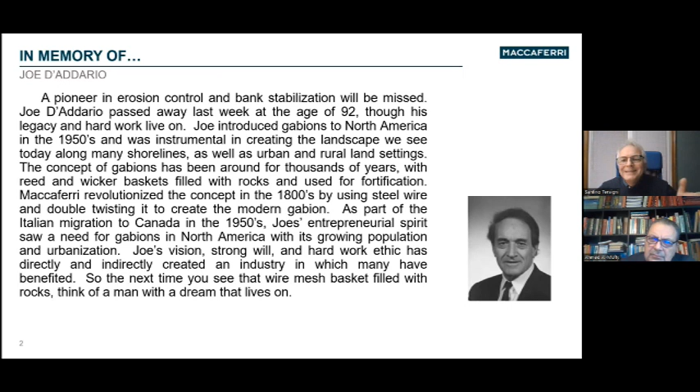And fortuitously, or not fortuitously, back in the 1950s, there was something called Hurricane Hazel. It was a huge hurricane that took place in Toronto. Major devastation, major problems, hence the reason why a lot of these conservation authorities developed here in the 1950s. Well, the wonderful part is gabions were used in Europe for a lot of transportation works within the watercourses. So Joe D'Addario had the perfect idea: why not use these gabions for watercourses? And that's why you see a lot of old watercourses used in conjunction with gabions, for bank stabilization along the banks.

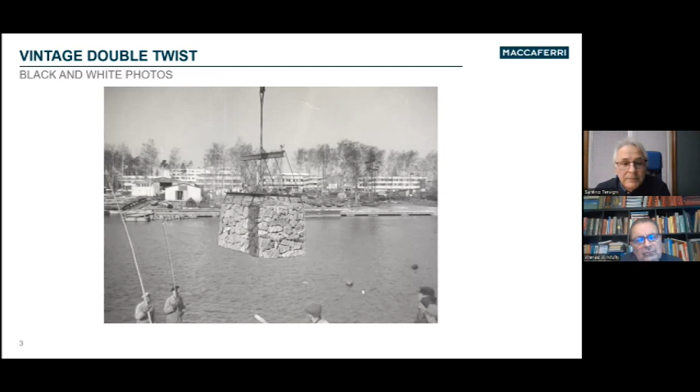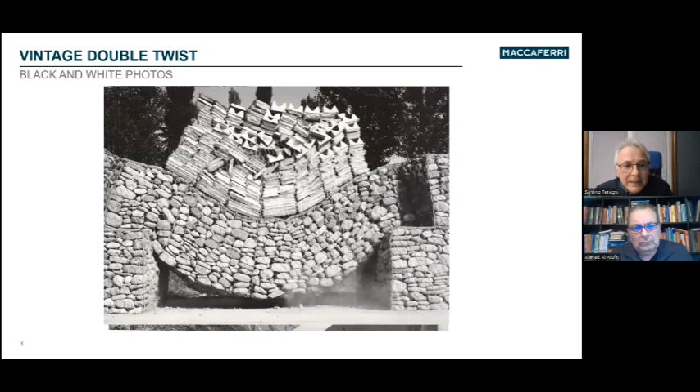So when you start looking at them, you start seeing gabions used all over the world. As I mentioned before, we started back in the 1800s when the Maccaferris first got their patent, but they've been used extensively. The gabions themselves are used in many configurations. They're wire mesh, and the wire mesh is used for anything from the gabions to rockfall mitigation. Testing's been done on the gabions to make sure that they're properly manufactured. They're used for erosion control in something called gabion mats or Reno mattresses. Again, back in the early days, they were cylindrical in shape.

Do you know the time these photos were taken? Well, that looks like a big steam shovel. I wouldn't be surprised if these photos were taken back in the 1940s or 1950s. Do you know when gabion walls were first used? Well, I'll get a bit back into the history, but Maccaferri introduced the gabions back in the 1890s. The gabions have a much older history, and I'll get into that in a minute. We're talking about 130 years for Maccaferri. Yeah, over 100, that's correct, over 140 years.

And actually, gabion is used in different ways. Gabion in Italian is gabione, and in French is gabion, which actually means cage. A gabion is a cage, like a bird cage. Oh, I thought it's a person's name. No, actually, Maccaferri is the person's name. The Maccaferris were blacksmiths. Macca means to beat, and ferri is iron. So you have Maccaferri, which means blacksmith. That is how the name Maccaferri came about.

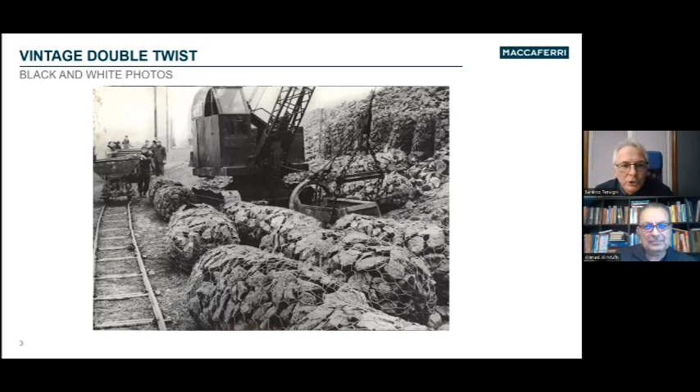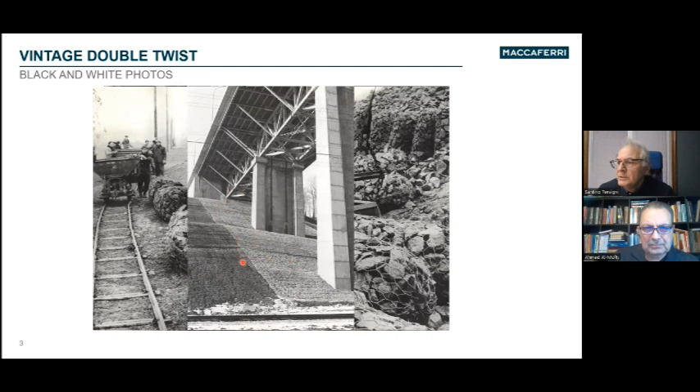But now you see these cylindrical gabions, and the same thing, they were used for erosion control. Rocks filled with baskets, or baskets filled with rocks, and they're used for shoreline protection. These same gabion mats are also used for erosion control underneath bridges and structures. So again, it's diversified in terms of what you can actually do with these gabion structures.

And yes, they've been used for a very long time internationally. But the main thing is, you asked about the history. What's interesting is the gabions actually started back in the Egyptian times. The Egyptians used to get reed baskets. So the reed baskets were filled up with rocks, and they were used along the Nile River to stop erosion along the Nile. And the same concept of baskets filled with rocks was also used during medieval times for

fortification. So there was a battle, there was some kind of a disturbance. They would get, again, wicker baskets, fill them up with rock. Once you have this, you can actually fortify your castle. And during war times, and Maccaferri was around during the World Wars, both the first and second, the same thing would happen with more or less fortified bunkers. They were used for fortification, the gabions themselves. Again, you're filling these things up with rocks. You're creating mass is what you're creating with these things.

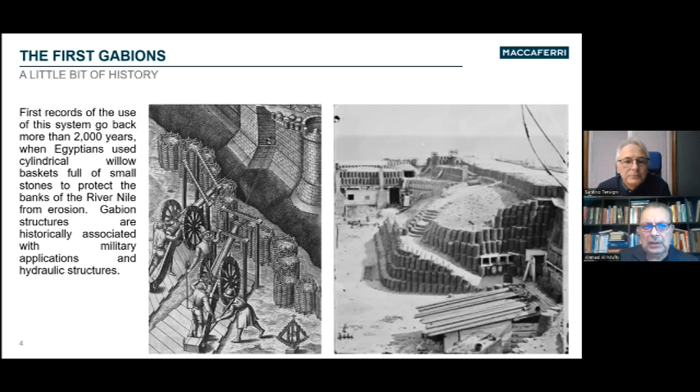Yeah. So where did the Maccaferris come in? We talked about reed baskets. We talked about wicker baskets. What the Maccaferris did, they modernized it. They introduced steel. They introduced the weaving system. So they had a small problem along the Reno River in Bologna, Italy. The same problem that happens nowadays, you have erosion along the shoreline. The Maccaferri solution: the same thing the Egyptians did, take these wire mesh baskets, pile them up along the riverbank, and let's see what happens.

Yeah. These ones which are already 100 years, are you talking also about steel meshes? Yes, it's steel mesh. There's approximately a 30% depreciation in the mesh. Obviously, you're talking about a structure that has gone through many floods and many disturbances, but the essence of the wall and the essence of this erosion control measure is still in place. Okay. Yeah, which is quite impressive.

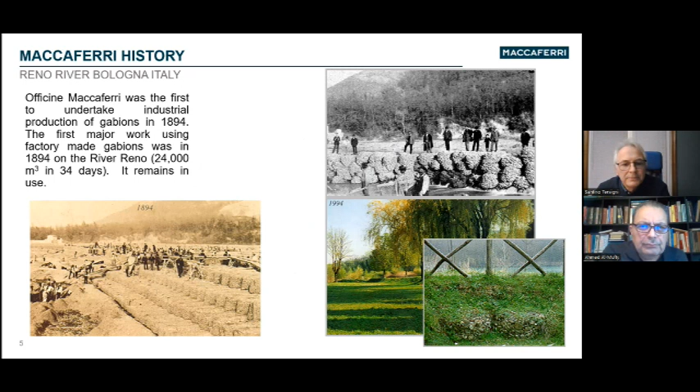Now, Maccaferri, from its humble beginnings in Bologna, Italy, is now an international company. We're all over the world, anywhere from Australia all the way to South America, into Russia, and right across North America. So it's an international company. What does it mean for everybody? It means there's a level of standardization. As you know now, globally, everything's our backyard. We can be in North America designing things in Australia, or in South America designing things in Russia. Anything is possible. That's globalization. Exactly. So that's where people can take advantage of this globalization by using this type of practice.

So Maccaferri has diversified quite a bit. Again, from this basic gabion concept, we've gone into rockfall mitigation. We go into dewatering, environmental. We get into other types of geosynthetics. We get into erosion control systems. So the company itself, because of the gabions and the demand by outside consultants and by our clients, has actually expanded in a lot of ways.

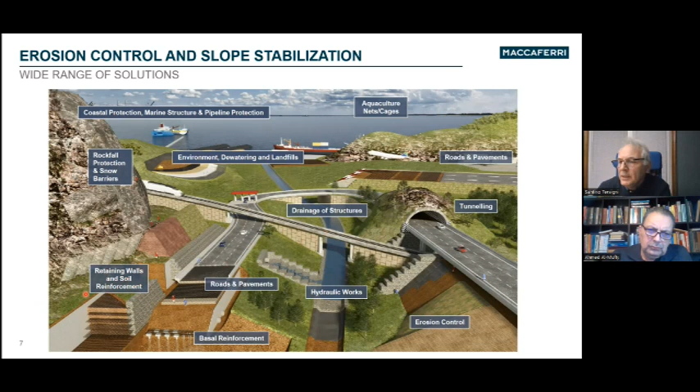We also get into ground stabilization, ground reinforcement, erosion control measures, erosion blankets. There's a lot that's done. Soil nailing, soil anchoring. Again, the company itself is diversified. The main crux today, though, we're going to concentrate on gabions. So the main area we're going to be dealing with is retaining walls, and in particular, gabion retaining walls. I wanted you to tell me, why should I go to gabion walls?

It's a 130-year-old technology, and it's been... Yeah, why should we choose Gabion walls? The biggest advantage to the Gabion walls, Ahmed, is its simplicity. They're a basic gravity wall or semi-gravity wall. So we can say, for example, I will save a lot of time for the project. There's a time aspect, but there's also a security aspect.

The best part about Gabion walls, let's say versus a concrete wall, we don't need a foundation. Gabions can more or less be placed on grade. Slightly buried, but we don't need a foundation for a Gabion. So they're excellent in North America where we have freeze thaw. Yeah. They're great in places where we have tectonic processes, where there's, let's say, a lot of earthquakes.

The beauty of the Gabions, and I'll show you in a bit, everything is connected together. They're also more flexible than a concrete wall. Exactly. And that's the benefit of the Gabions. You see them used in Europe almost exclusively in the mountainside for that flexibility. Everything is clipped and laced together to create these monolithic structures rather than blocks being placed together. That's where these benefits come in.

I use the Gardiner Expressway every day, and I see Gabion walls on my way. Are they yours? Possibly. If they were done a while back, they are. But no, it's like maybe recently, maybe 1 or 2 years, and they're still working nearby.

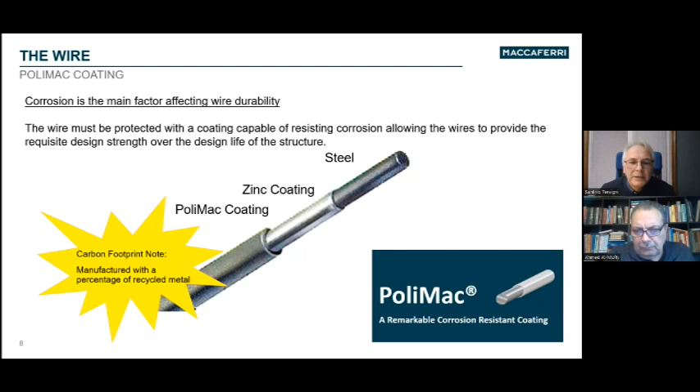The PoliMac coating, and that's the benefit of the PoliMac coating. We're finding out that sometimes the old steel is not the best steel. Sometimes the new steel has to be vamped up a bit, and that's where the PoliMac comes in. With this new coating, we're able to get better abrasion resistance.

What is abrasion resistance? If you think of it in watercourse applications, as much as the water seems clear, for streams, creeks, rivers, there's always particles within the water. And these particles have a sandblasting, abrasion effect. And that's where the PoliMac comes into play. It's 10 times greater than regular galvanization and regular PVC coating. Much better.

Low temperature resistance, UV resistance. You find now that the UV obviously is much higher, and this is not only in Canada, this is also international, and that's where the PoliMac excels. As well as for us, low temperature is important for us.

Especially now, we're freezing all the time. Yeah. We're freezing all the time. Yeah, so it's one of the disadvantages of being in the Canadian, I wouldn't say the Canadian Arctic, but in the Canadian environment, we have these 4 seasons, and this cold winter season. Yeah, definitely, it's very cold.

So again, this also goes into resistance to installation damages and chemical resistance. So overall, we've done the testing with it, and PoliMac is the material of choice when it comes to areas where there's aggressive environments, and that's where we like to use it.

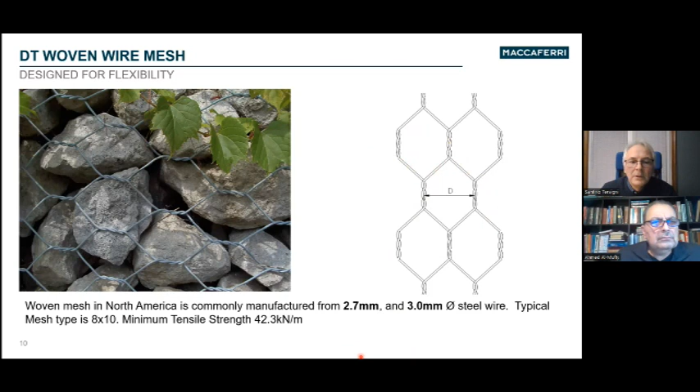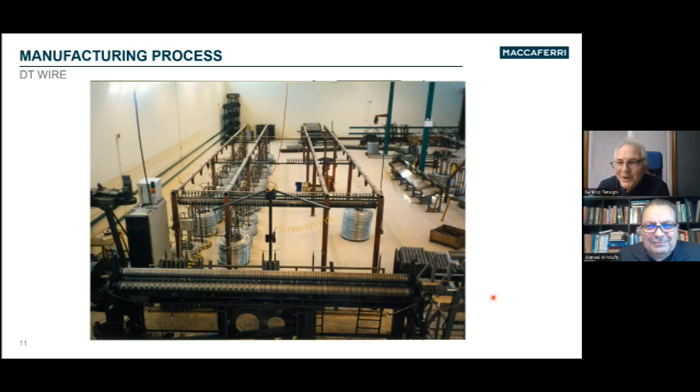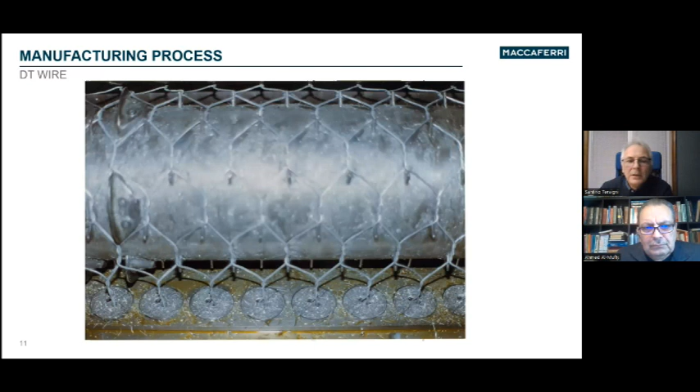Okay. So the process itself is straightforward. We have what's called weaving machines. The same way you weave clothes, you're actually weaving wire mesh. If your audience goes online, you can actually see the weaving process. It's actually kind of neat, a very interesting process. And it creates this mesh. Once it's done, this mesh is then made into baskets, into gabions, or it can be made into other products that Maccaferri manufactures.

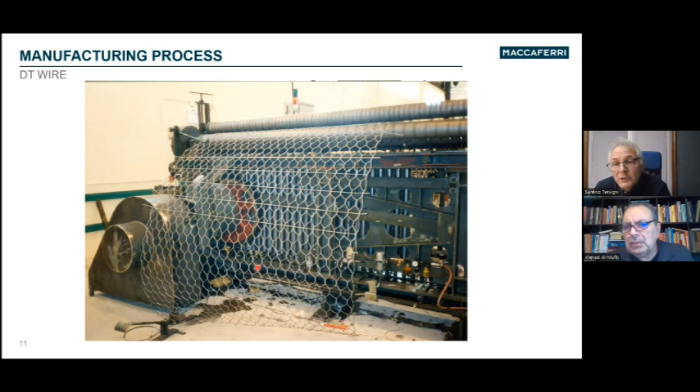Do you produce the baskets in the same factory, or do you take the wire mesh to another factory? It's all in one factory. The wire is given to us, and in certain places, we actually draw the wire ourselves. We also coat the wire with PoliMac in-house in our facilities. Once that's done, the mesh is drawn out either in 2-meter or 3-meter sheets. We can also go up to 4 meters, but 2 to 3 are the standard. These are not rolled in long rollers, but they also can be rolled if used for rockfall mitigation. We also sell rolls of mesh. Oh, so you can do either. That is correct, sheets or rolls.

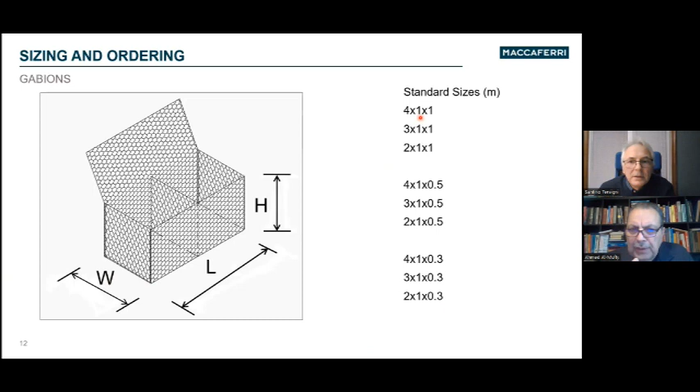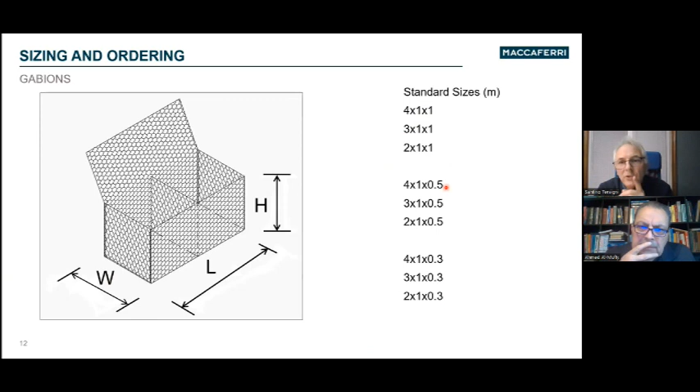Now, which one is the height? It's 4 meters. 1 meter is the depth. 4 meters is the length. 1 meter is the depth. The width. Is the depth, the width? You can say width, yes. And 1 meter is the height. Is the height. So the one changing is the height. So correct. You have 1 meter, 0.5 meter, and a very short one, 0.3. 0.3 meters, 1 foot. Yeah. Correct. Though I'll show you in a second, if you look at the baskets, they become flat.

So theoretically, you can get a basket, and during the assembly of it, you can shift it on its side, so it can still be 4 meters. Now it can be either 0.3 or 0.5 meters in width and 1 meter high, by how you actually lace the basket together. Okay. Right? So when they do come to the site... How do you fix these baskets? You do them at site, right? Correct. And that's the benefit to the system.

They come in bundles. Once they get to the site, think of it as a banker box you would get at one of these stores. The box, you fold it together. Once the box is folded, it's either clipped or laced together at the edges. And you create individual boxes. What do you use for the clipping? The clipping is something called a Spenax clip, and I'll show you that in a minute. Yes, please. These are hog rings. It's like a C, and the tool squeezes it to make a complete circle, to make a completed clip.

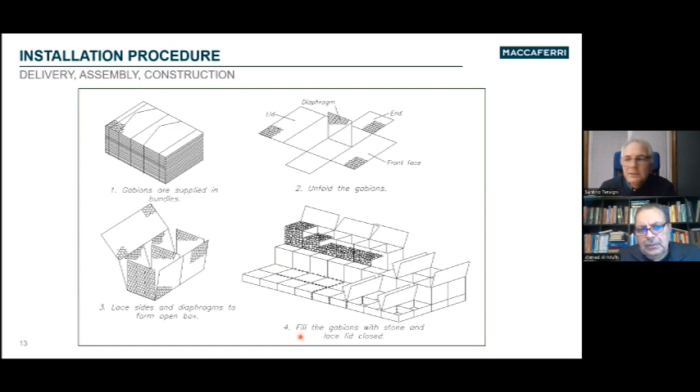So as we discussed before, because you created this monolithic structure, it's great in areas where there's differential settlement. It's great in areas where there's seismic activity. It will give you a lot of flexibility for the movement. That is correct. And that's the benefit to the system, is that flexibility. And you mentioned how they come to the site, and this is another benefit to this type of system. Because we can carry so many gabions to the site, there's a huge reduction. The only two materials you need are your gabion meshes and the rocks. Maybe a couple of boxes of clips and that tool you're talking about.

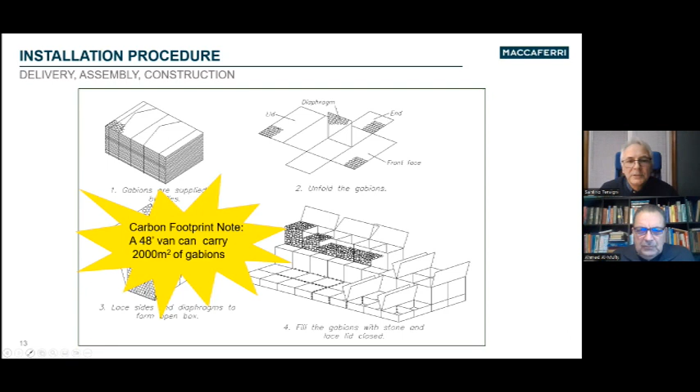That's it. So they can be shipped internationally. So when Mr. Joe D'Addario was here in Canada, he was shipping them, and you were getting lots of material in a container versus concrete blocks. Nowadays, these blocks are anywhere from a ton, 2 tons sometimes. So there's a lot of carbon wastage using a lot of these blocks. I understand the efficiency aspect of it, but again, this is something to consider during the process. Well, of course, it's considered these days. But I love it. That's why I love engineering, because you can always have very simple solutions for very big problems. Exactly.

So Ahmed, you mentioned the clip. There it is right there. It's something called a Spenax clip, and it uses something called hog rings. It's a pneumatic tool. You need a compressor to operate it. Once you push the trigger, it creates the clips. And typically this is what we use in North America. We also have wire, and this wire can be used to do it manually. So the manual system is just lacing it together. Same way you would lace your shoes, you would also lace these gabions together.

So do these have special tests? Correct. We've done testing on both the lacing as well as the Spenax clips, and it's comparable. Either system is acceptable. In Ontario, do you know what kind of tests you applied? Is it just a tension test, or what do you use usually? It all goes by ASTM A975, the ASTM standards. We will check that, no problem. Yeah, okay. But it's through ASTM when we do the testing of it.

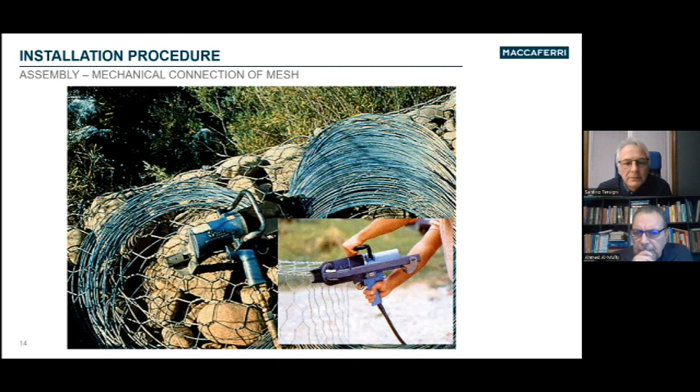So the next is the rock. We discussed the rock. The rock that's typically used right now, you're looking at a 100 to 200 millimeter stone is what you'd like to use. And it's a gradation of stone. Typically, it's a fractured stone that is used. River run stone is sometimes used. We don't recommend it because of the roundness, and sometimes it doesn't have that interlocking. We will lose the friction.

I don't agree with river stones. No, river. But they're done. Sometimes it's available, and if done properly, the walls could still be done. But again, you will have less stability for that. Yeah. I'm a fan of the angular rock, is what I am. Of course. And it's cheaper, I think. No? Which one is cheaper?

What's cheaper right now is usually what's closest to you. So if there's a quarry nearby, typically a quarried stone is the cheapest here in Ontario, where we are. And there's quarries right across Ontario. So typically the nearest quarry is the best. The river run stone usually is a premium.

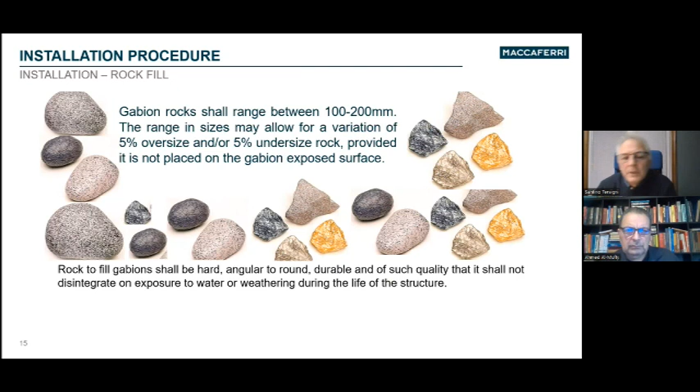So the other thing that we get into too is, can we use recycled concrete in a gabion? That was one of the questions that gets asked. We actually had a couple of projects. The answer is yes, you can use recycled concrete, but there's a caveat. As long as it's air-entrained concrete, so if it came from a sidewalk, if it came from a curb, as long as we know it's not going to break down with freeze-thaw, you can actually use recycled concrete within a gabion, which is huge for carbon.

If you think about carbon footprint, if you're doing urban work downtown, let's say in Toronto or downtown Cambridge or anywhere else, this is great. You're reusing material to create a wall, which is fantastic. What do you mean by which concrete you said you can use?

It has to be air-entrained concrete, meaning that there's air entrainment so that it deflects from the freeze-thaw. So the concern is freeze-thaw, and it'll break down the concrete. If it isn't an air-entrained concrete, it might break down. So if it was an old concrete curb or an old concrete sidewalk that is air-entrained, that was designed and developed for use in outdoor applications, if that is broken down into a 4-inch to 8-inch or 100 to 200 millimeter stone, that's perfect. Okay.

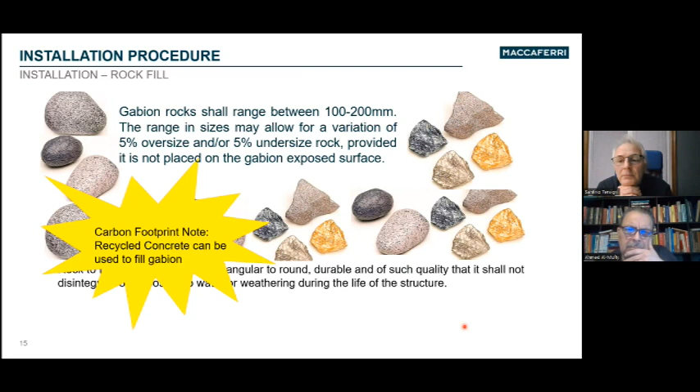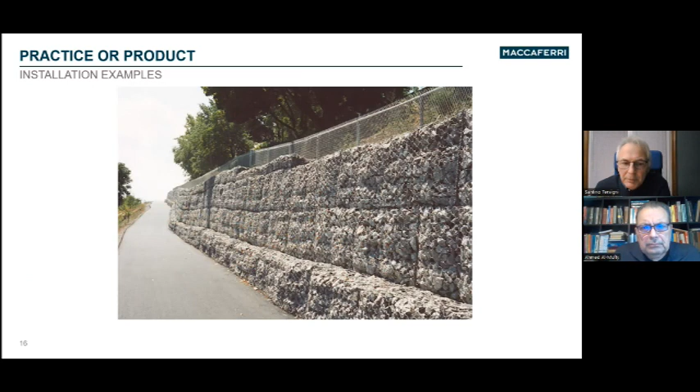If a true gabion wall is created, like the only demerit I give to this wall, you see this bulging? This bulging is consistent, though the gabion wall should not be bulging. If done properly, the wall should have a very flat appearance. It should have a cladding-like appearance in the front. And that's done by actually hand placing the stones in the front. And that's how you get that beauty. That's how you get that interlocking effect and that stability.

How does that work? Well, it'll be up to the consultant. It'll be up to the site engineer to make sure that the due diligence is done by the contractor to make sure that he does a proper job during the installation. Like anything else, if the asphalt isn't put in properly, take it out. If the concrete isn't put in properly, take it out. If the gabion wall isn't done right, take it out until it's done properly.

Did you ever try to use these paver coatings that we use for our backyards, and you know, it gives some glossy look, like a wet look, to the rocks? So this would be like a coating on it, or like a shellac on it, you're saying? Or I don't know, glossy? What do we call that.

It's like you spray it with a material that keeps it looking wet, something like that. I think it will be very beautiful to use that. We've seen projects around the world. If you really want to get into it, by using different colored stone, you can actually create designs and patterns in the Gabion. Yeah, I think it's worth it to study this issue, because if we have something beautiful in addition to the other benefits, that will be great, I think.

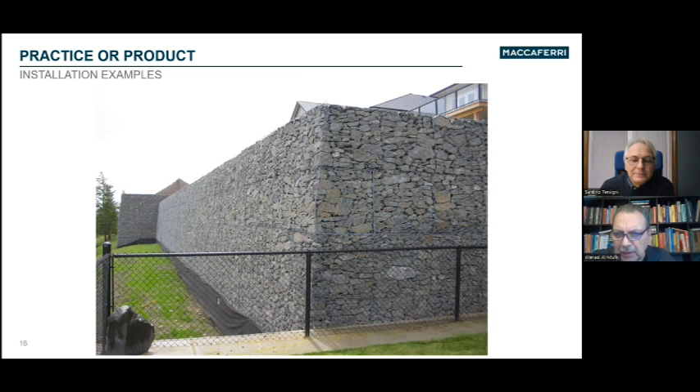But we call it sealing. To seal it, yes. We call it sealing for sealing the pavers. Yes, paving. Yes, it can be done, if you like. We can use this on the Gabion walls, no? To give it that shiny look, that glossy look. It may have a very nice look after sealing.

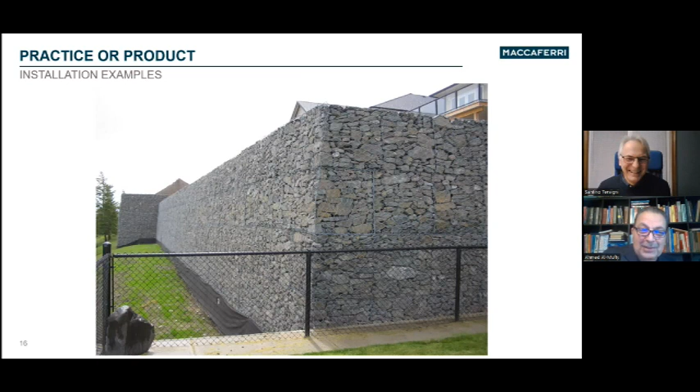Yeah. I think you're onto something, Ahmed. You should patent that idea. We need to have a patent for this one. Yeah.

So, design of Gabion walls. This is what I like. This is you, and if you like, you can talk about it. Typically, with the design aspect, there's a couple of ways of doing this. Option A is we have design manuals where you can do it manually. We can provide that for the consultant to design these Gabion walls. That's option one. Option two is, as a manufacturer, we provide design assistance. So as you give us the various information, foundation soils, the friction angle, unit weight, loads, things of that nature, we can actually do the design for you. These are preliminary designs, but we can provide that for you.

The third option. The geotechnical engineer should care for a couple of things here. First, we don't use Gabion walls as embedded retaining walls. They're not embedded. They are built, and the space behind them is empty, so you need to fill the space while you're building them. The second thing is, most probably, the material behind the wall will be draining. You can't keep that material saturated. It's always draining.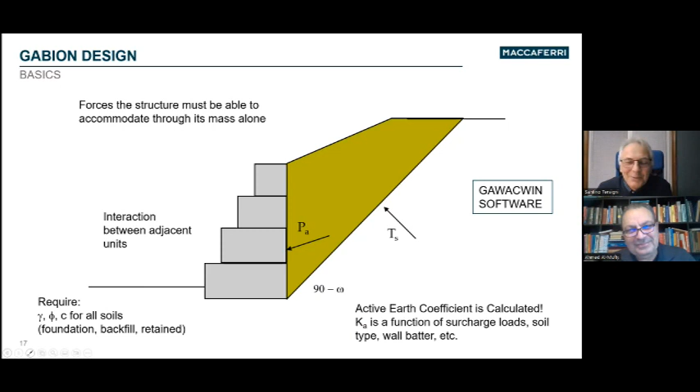If you're the homeowner that has your house at the top, chances are you'd like this type of system because you're gaining a bit more land. If you're the homeowner at the bottom, chances are you'd like this type of system because you'd like to look at a stepped structure rather than, let's say, a very high structure. There are many factors to choose which one. Also the material behind, who is providing it, how it is constructed.

Which one do you think will be more costly? Either one is acceptable, Ahmed. It doesn't make a difference for us. Typically, in most instances... And it's beautiful how you showed this because there's a small angle at the bottom that keeps the stability of the wall higher, because if you put the wall exactly horizontal at the bottom, that will have less stability than this case. This will offer more stability, especially if you have earthquake effects.

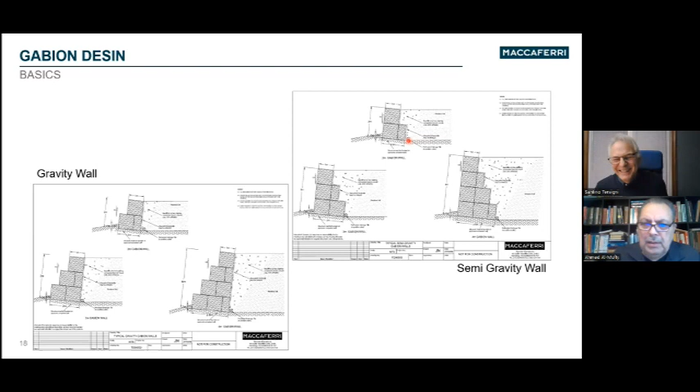For gabion walls, yeah, it's a good question. The highest gabion wall I've seen to date is over 20 meters in height. 20 meters. Correct. There was a reason for it, but again, it was over 20 meters. Typically, with gabion walls, it becomes a cost-effective aspect of it. Within 4 meters, 5 meters, they're cost-effective.

Once you start getting over 4 meters, over 5 meters, you start looking more into mechanically stabilized earth walls, MSE walls, using tiebacks and using granular backfill. It becomes a cost issue. That's all it is. But gabion walls, in terms of height, like I said, up to 20 meters. I've seen walls up to 20 meters, and there were certain reasons for creating a wall that high.

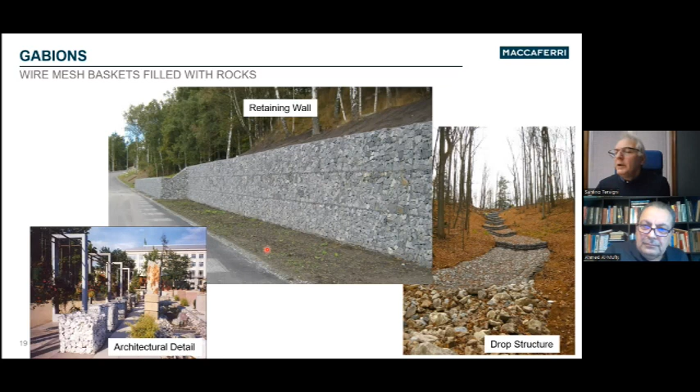Ahmed, unfortunately, what we've created in this society is for everyone that says black, someone will say white. For everyone that says tall, someone will say short. For everyone that loves gabions, there's a group of individuals that would rather see something else for whatever reason. For myself, these are the beauties of the gabion. The beauty of the gabion is using natural stone, native stone. It's the hand placing. It's the artistic value behind it. That's where I see the beauty of it. Some people might see it in other ways, but I see a certain beauty associated with gabions.

Give me a couple of minutes more and tell me about the durability. How can we ensure durability of these walls, and how long do you think the durability will be? Well, right now, in terms of durability, Ahmed, the beauty with the gabions is the PoliMac coating. We have done testing on the PoliMac, the in situ testing. As part of our international group, we had it tested in the UK by the BBA, the British Board of Agrément. They've given it over 100 years, 120-year longevity for the PoliMac coated wire. So in terms of longevity, a very long time is what we have for these walls.

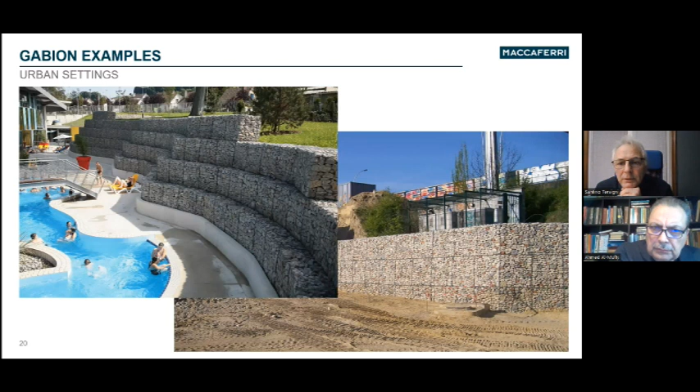If the gabion is damaged, if the wire is just damaged, think of it as a bicycle tire. More mesh can be placed over top of that area and simply clipped to the basket, if it's just the mesh that's damaged. Maintenance is easier anyway. Yeah, it makes sense. With the gabions, like I said, there's a lot of benefits to it. And the biggest benefit is, again, the repairability of the gabion.

Have you ever shotcreted an existing gabion wall? We had one project. I don't have it during this presentation, in the slide deck. We have one project in Quebec, a park, where the gabion wall was shotcreted to give it that rock face look. So the entire gabion wall was shotcreted.

Again, this brings into effect other engineering concerns, and one of them is a drainage aspect. Another is making sure that the gabion is properly installed so that when it is shotcreted, there's no movement and everything starts to crack on you. But yes, it can be shotcreted. Absolutely. It can be done.

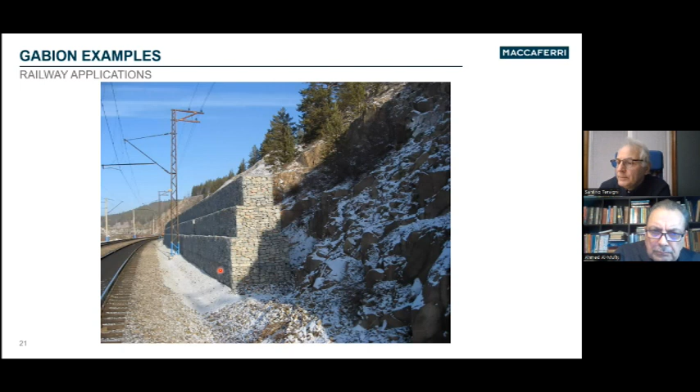So again, different areas using different things. This particular one is for transportation works in a railway. Here you can actually see the gabion wall, and you can see the cross section of the gabion. You see them a lot of times along roadways. In this particular instance, we don't see any vegetation growing. In some instances, we have vines growing through, vegetation growing through the gabion, so it actually blends in very nicely with the surrounding area.

Yep. You mean intentionally or by nature? By nature. What ends up happening is over time, you do get depositional material. Let's say there's a storm, seeds get blown around, seeds get embedded on the rocks themselves, and you do get vegetation growing on it.

How about animals? Good question. Two things can happen with the gabions. Either, sometimes we do have some animals that burrow into the gabion itself and create a hole. Other times, if it's south-facing, it's a deterrent because it's very hot, so a lot of animals don't like burrowing into the gabion itself.

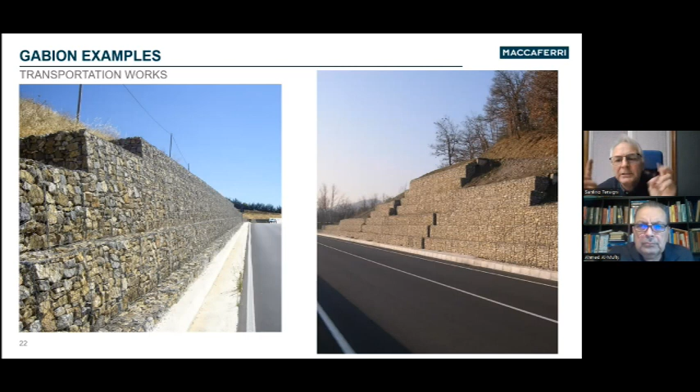So again, it all depends on where it's located, on what's behind it, on its surroundings in terms of animals. Typically, the gabions themselves, with the mesh, with the rock, are more of a deterrent than a habitable place for animals to live.

Testing, you mentioned testing of the gabions. Yeah, that's important. We've done all types of testing on the mesh so that for our designs and our design software, we know what we're dealing with. Quite a few different tests are done on a regular basis. We also have certifications for our gabions if requested, where the wire is tested at our manufacturing facilities to make sure it meets the requirements on our spec for our product.

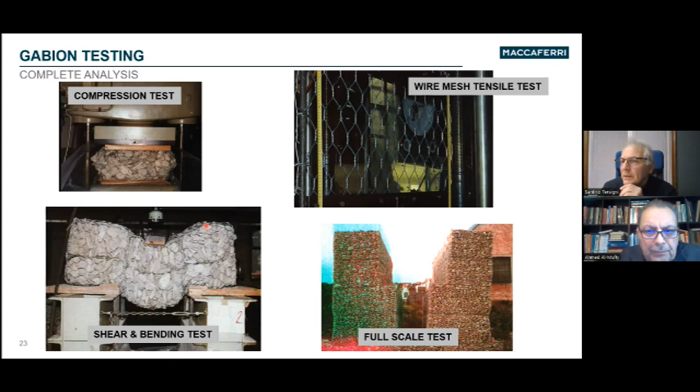The top one on the right is the wire mesh tensile test. In this case, you test the wire itself, and you have a full scale test. So there's all different types of testing that we do on these systems for the gabions themselves. We do a complete analysis of it when we put it together.

Yeah. So again, that's one thing with us, Ahmed: as a company, Maccaferri is the one that provides a lot of it. There are a lot of other things coming in from abroad. As a company, we provide a lot of the backup for our systems. We provide the design, we provide more or less the education, we provide the assistance, and that's something that unfortunately I have a concern with.

A lot of times, a homeowner or a contractor will look at it and say, well, your pricing might be more expensive than somebody else's. Yes, but we're here. We've been here in Canada for the last 60 years. We've been international for 140 years. If you do buy from this other company, where's the warranty? Where's the guarantee on this? What happens to this thing? Is a person going to come out and see what's happening with it? And that's where Maccaferri comes into play. Right, we're there. Of course, there's that aspect of it.

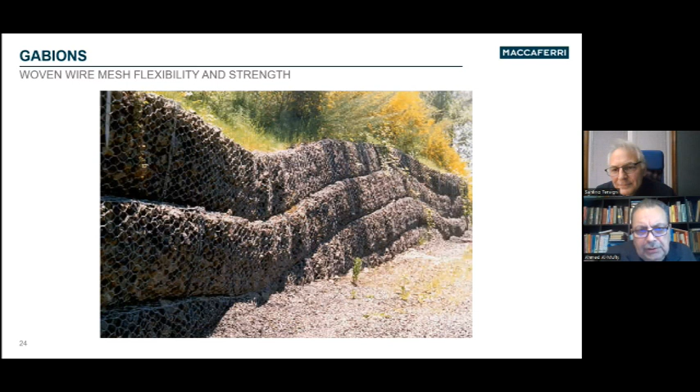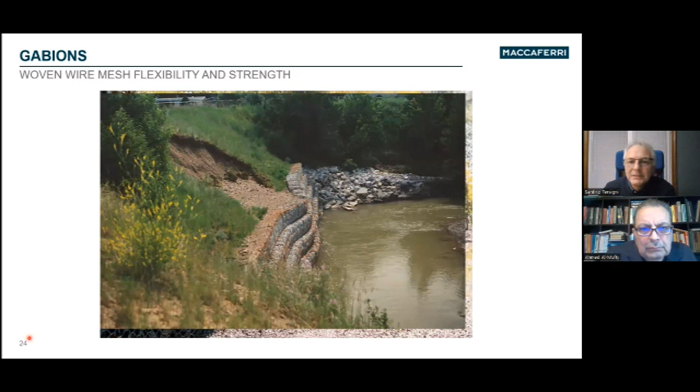So in terms of flexibility, we discussed it, and here it is right there. It's very clear that the wall is standing in strange and difficult conditions. As you mentioned, it's coming out. With this one here, there was a bit of a landslide above the wall itself, and this landslide actually pushed out the gabion. Typical walls would have just come out right into the stream, whereas with this one the gabion itself actually deflected.

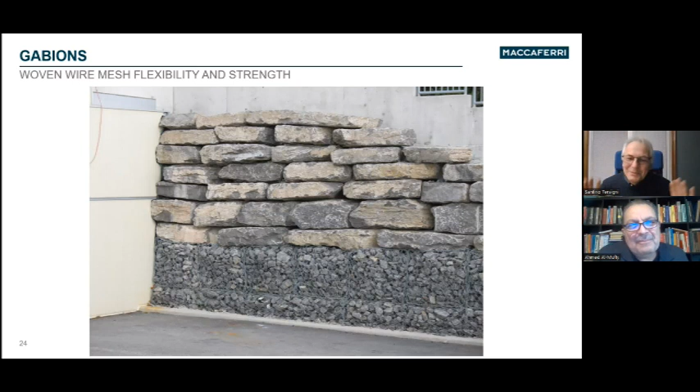But what's great with the gabions, and this is my summary page here: we still find it's a very low cost system compared to other retaining wall systems. The flexibility is great. We don't need a foundation for these gabions when designing with them. They're free draining, which is fantastic if there's any water pressure behind the wall, or during freezing and thawing, especially in the North American environment. Vegetation: in some areas you don't want to see it, in some areas they like a bit more. In some stepped structures, we get vegetation growing on the front face of these gabions.

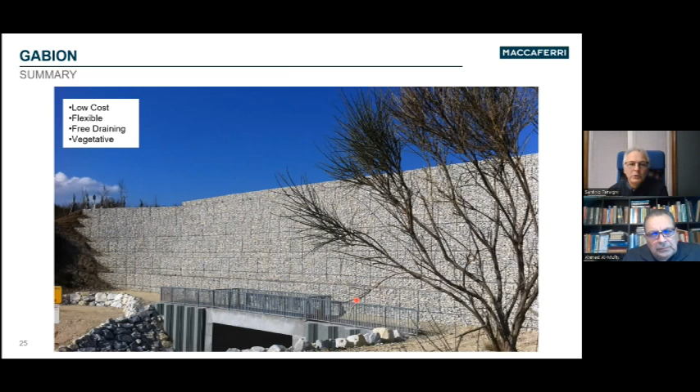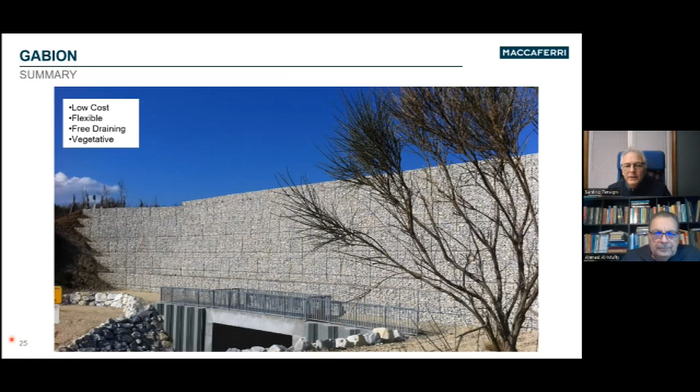Another thing we've noticed, Ahmed, is that with the gabions themselves, you don't get a lot of graffiti. On a lot of block walls and concrete walls, we tend to see a lot more graffiti, whereas on a gabion you typically don't. That's because of the gabion stone itself. It isn't a perfectly flat surface, so you're going to need a lot of spray paint to get your message across.

Another thing that happens too is noise suppression, sound attenuation, noise barriers. Yeah, that makes sense. It will really suppress the sound from reaching the other side. Exactly. As much as these Gabions are interlocked in the front, there's still void spaces in there, and those void spaces act as an area to absorb that sound. As well, the Gabion stone is not perfect, and because the angles aren't perfectly flat when you're facing it, this will really lessen the echo and isolate the sound transmission. Correct. What else do we have here?

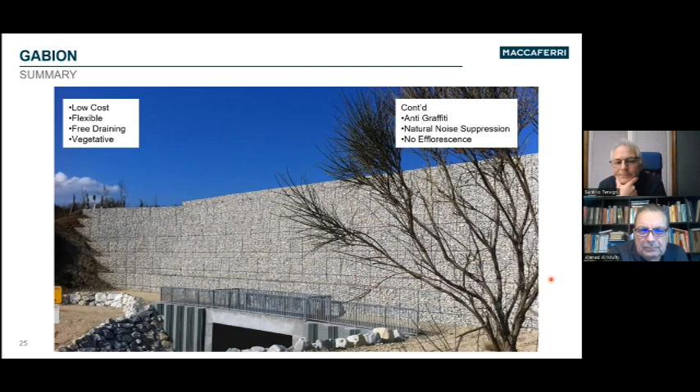And the last one here is the efflorescence. What happens sometimes with concrete, even manufactured concrete stone, you have this natural efflorescence that comes out of the stone itself. Using just regular or natural stone, you don't have it happening. Because they're already weathered. They've been washed many times. You have natural stone being used, exactly. Okay, sir. That's really that part of it.

The next part of it is more or less a climate change. If a lot of your audience is into this, we find that if you start doing an analysis of Gabion walls or some of our Gabion structures versus concrete or some other systems, there's a huge benefit from a climate change and reduction in carbon footprint standpoint. Because we're using natural material. All we're using is Gabion stone that's been crushed from a quarry, or even river run stone from a local area, rather than concrete that has to be put through a kiln with limestone, mixed with cement and everything to create these walls. So huge benefits in that respect.

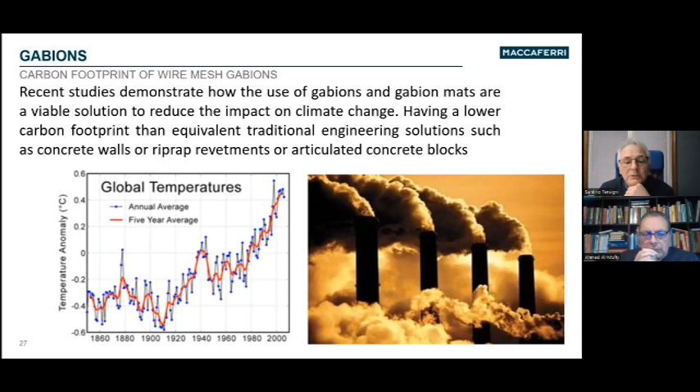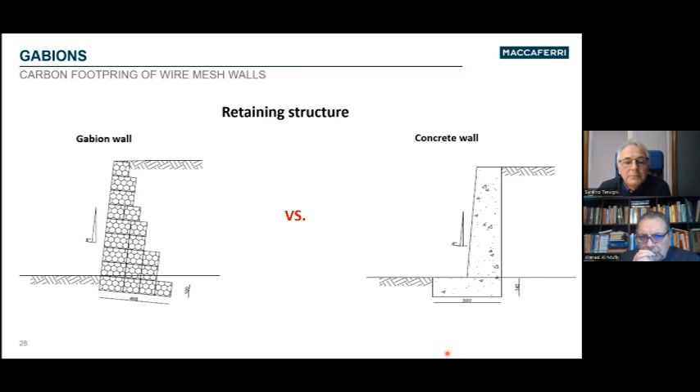So again, if we look at a concrete wall versus a Gabion wall, and we look at the wire mesh that's used versus the cementitious material, again, huge reduction in carbon footprint from a wall standpoint. And the most important thing, the cost. Yeah, exactly. The cost comes with it. I mean, the cost itself.

Yes, exactly. So when are we visiting Italy? Whenever you like. They're always waiting for us there. Mind you, we have plants internationally, anywhere from the US, Mexico, South America, Slovakia, Africa. They're manufactured worldwide, so we can travel almost anywhere around the world for these Gabions.

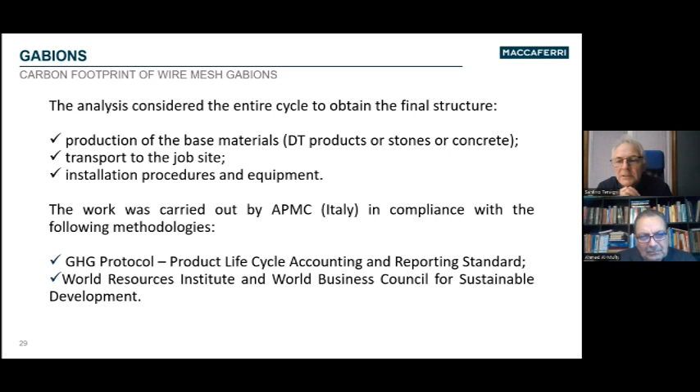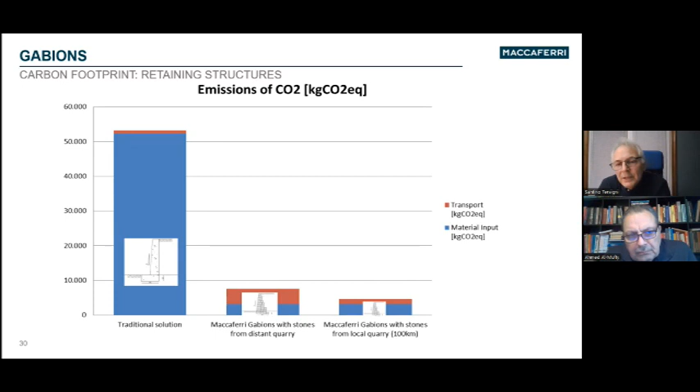And going back to the carbon footprint, testing has been done not here in Canada, but because we're an international company, through our corporate head office. They've gone through a lot of the methodologies in producing these test results for the Gabions themselves. This gives you some indication of the reduction in carbon footprint, the reduction in CO2 gases by using these walls. So it goes back to the sustainability aspect of these walls. A lot of times a contractor or the owner might look at the cost, but overall there are other aspects of the Gabion that should be taken into consideration when using it.